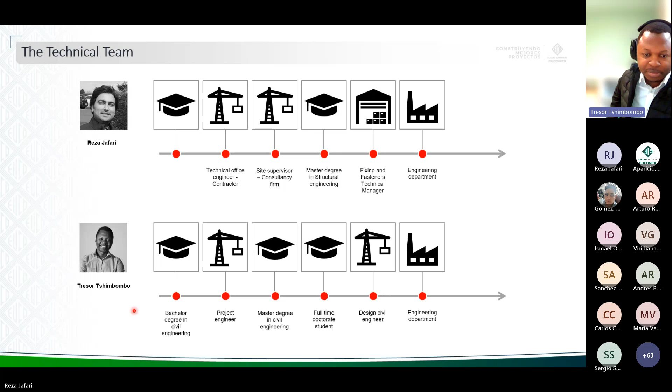Well, my name is Reza. I'm a civil engineer, and I've also got a PhD in civil engineering, working on tunnel segments made of fiber reinforced concrete. The world of anchoring is relatively new to me, but not the world of designing, because I've also had a background in a design civil infrastructure design firm. So yeah, I'm here and I'm happy to support. Yeah, thank you very much.

A wide spectrum of bonded anchors are currently available around the world. There are different types of categories and classifications of them, but the most standard version divides them into two main groups: capsule systems and injection systems. When it comes to capsule systems, we are talking about different types of chemicals that are inside a capsule type of anchoring. The other category is injection systems, and it's divided into three groups.

Today, our focus is more around organic binding material, which is going to basically cover unsaturated polyester, vinyl ester, and epoxy. So our focus is here, and please bear in mind that when it comes to chemical anchoring, there are a lot of different types on the market, but today's focus is only on organic bonding materials.

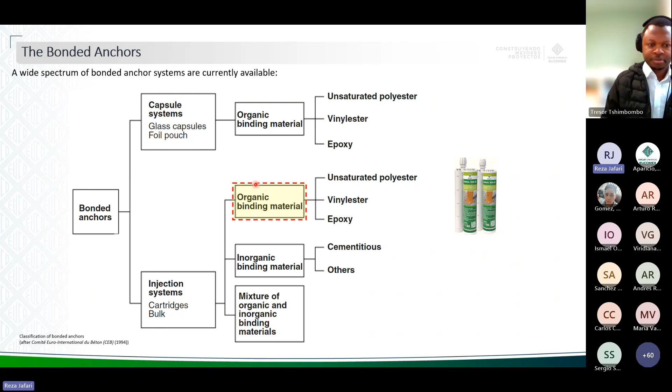When it comes to bonded anchors and injection systems, we are talking about cartridges. Cartridges usually contain two different types of chemicals. Universally, they call it part A and part B as two components - resin plus hardener and catalyst.

So what does it mean? It means we have one chemical here and another chemical here. When they're coming out and going into the mixing nozzle, that mixing nozzle is connected here - this is the static mixer. Those two chemicals start to mix into each other, and the final compound coming out of the mixer is two chemicals that got together and start to react.

So we are dealing with types of materials that react to each other - a chemical reaction, and that chemical reaction results in a bond between two different materials.

So when we are talking about two different materials, we are talking about inserts and base. The inserts can be threaded rods or rebars. We have more inserts available on the market, but today we are just going to focus on threaded rods and rebar because the practical reason is they basically cover most of the applications. And talking about base materials, we are talking about something that we want to connect these elements or inserts to.

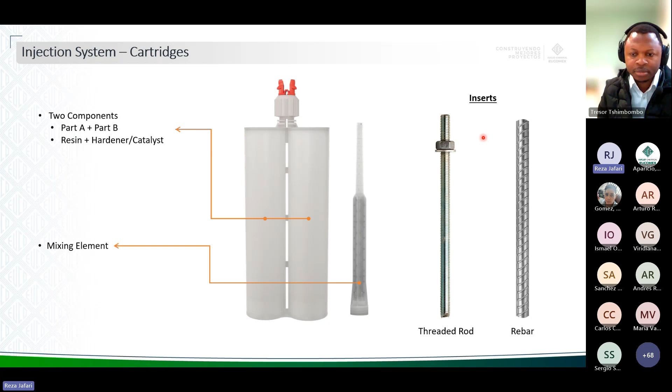Let's talk about mechanical anchors versus chemical anchors. When it comes to mechanical anchoring, the load transfer mechanism is mostly around mechanical interlock and friction. So basically we have a space around the anchor, and when we have a load - a tension load here, for instance - that mechanical interlock helps the system transfer the load.

When it comes to friction, it's all about those expansion anchors into the concrete. So when we have these kinds of anchors, it's a through bolt here, a wedge anchor. When we have them installed, we have an expanded part of the anchor - this cone goes through the sleeves and imposes some of the loads to the side. So we say we have a friction mechanism.

And finally, we have bond. What does it mean? It means we have the insert, we have the chemical all around the insert, and then we have the base material, which is concrete around. So basically, it's gluing our insert to the base.

This picture shows the effect of being close to an edge for a case of having a mechanical anchor. Mechanical anchors generate a lot of expansion around this area. And if we are, for instance, installing a post to concrete or base, and we are close to the concrete edge, then we have failures.

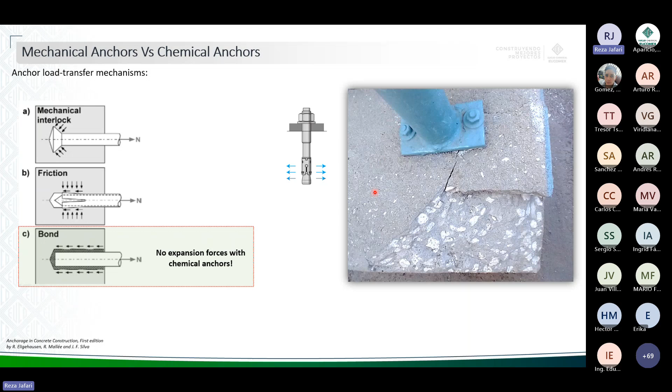Chemical anchors in general are sensitive to different things. The most important one is the resin type. When we have a different resin, even if it's produced by the same manufacturer, we have different characteristics. So the type of chemical is something that is going to change the behavior of the chemical.

The second thing chemical anchors have sensitivity to is the anchor rod diameter - the diameter of the inserts, if you remember, I was showing the threaded rod and rebar. The size of that element is going to affect the bond strength or the resistance of the system.

The next element that affects chemical anchors in general is concrete class. Concrete class can be from C20/25 to C50/60. These numbers can be different around the world, but at the end of the day, they are all talking about the compressive strength of the concrete. So if you're dealing with different concretes, the behavior of the chemical anchor is different.

The next one is concrete saturation. Is the concrete dry? Is the concrete wet? Is it a flooded hole? The meaning of flooded holes is you have a hole on the job site and the water is inside the hole. These things can affect the chemical anchors.

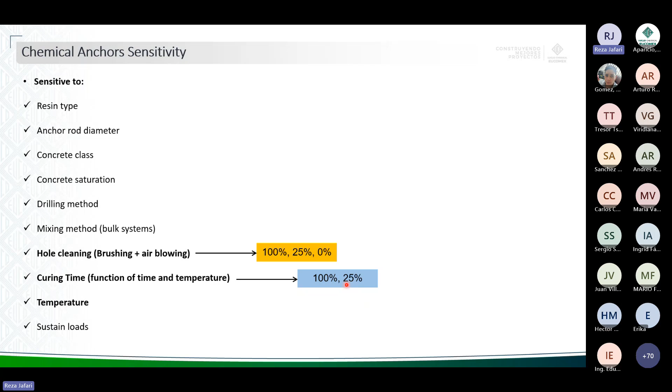Cleaning methods. Why is cleaning so important? Thorough hole cleaning, it is crucial for a strong adhesion and load capacity for bonded anchors. So basically, manufacturers on the market introduce something called manufacturer's installation instructions, or printed version, which is the MPII, and we are definitely referring to that.

I'll give you an example here. If you have one chemical on the market and the installation instruction, let's say the printed version, is something, and then you have another chemical and the printed instruction is something else, it shows that although they are both chemical anchors, the installations are different and can be different. So it's really important when it comes to hole cleaning to just adhere to the printed versions of manufacturer's installation instructions. Basically what you have to do is follow whatever is written in the product's approval. It can be the European or the US version of the approvals, whatever it is, we just have to stick to it and perform the installation.

Usually for normal applications, let's say DIY or small applications, a manual blowing pump can be used to remove the dust from the hole. This dust is created when you drill the hole. Again, it's very important, because if it's not done properly we're going to end up having dust in the hole. And when you put chemicals into the hole, instead of sticking to the side of the hole, they're going to stick to the dust, so basically the bond behavior or the resistance would be reduced.

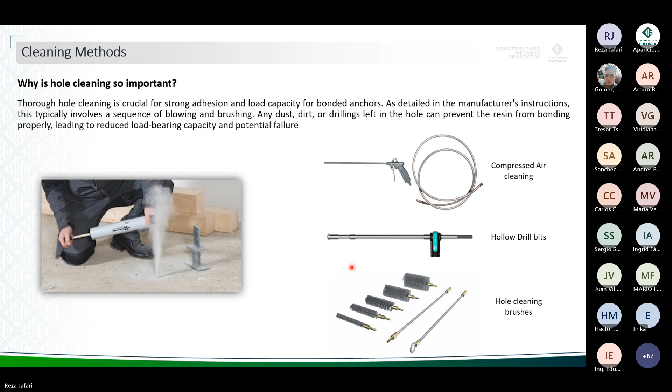If we reduce the hole cleaning, if we don't clean it properly, we have reduction. I don't want to explain about numbers, but what is important here is we have like 30% reduction here, and it's huge. So it means if we don't have any cleaning, we are basically risking the system because the bond behavior or the resistance would be reduced.

For bigger sizes, because the amount of dust inside the holes is quite considerable, that reduction is even more significant, around 65 to 70%. So again, be careful when you deal with chemical anchors, they are very sensitive to cleaning, and make sure that you perform the cleaning properly.

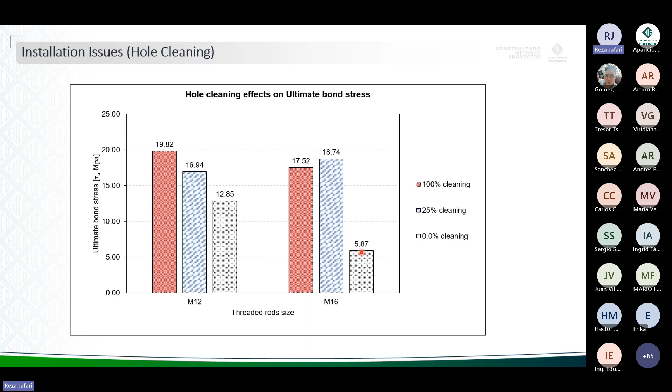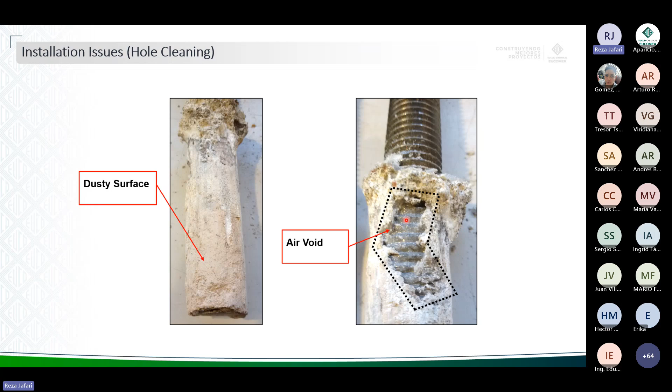And these are the threaded rods when the cleaning was not perfect. You see, after pulling them out of the concrete, all the surfaces are dusty. So dust is everywhere. And because we had all those debris inside the holes, we can end up having air voids as well.

Basically the warmer the weather or the environment gets, the curing time will be shorter. So if it's during the winter and you are dealing with a chemical resin, usually the curing time is longer than the curing time for the same resin when it's summer.

So how can we understand these times, the durations and everything? They are all mentioned in the product's approval. So when it comes to projects, the designer basically puts something as the specification for the resin, and then there is the supervisor on the job site responsible to check these times. And at the end, I think it's a responsibility of the person dealing with the chemicals to understand that the hotter it gets, the shorter the curing time and the working time as well.

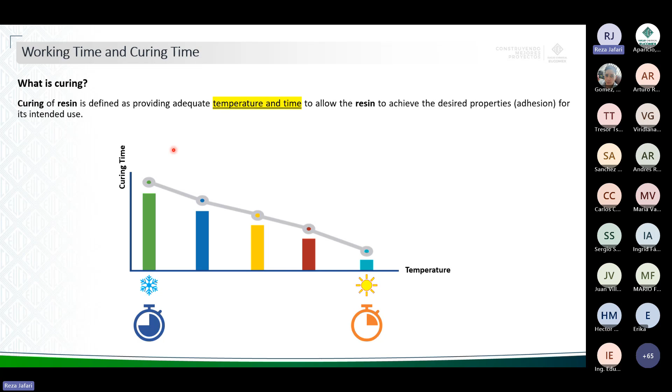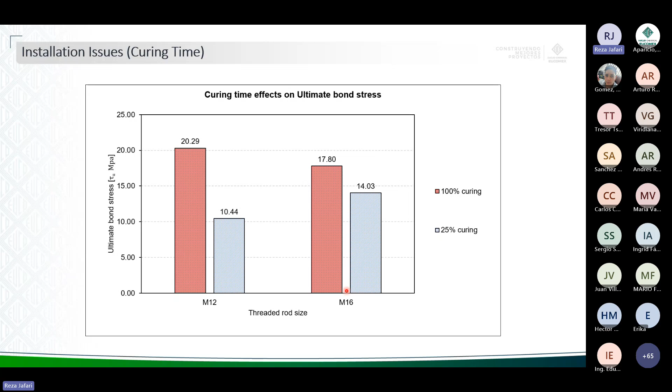Here, just another graph shows if the curing time is not respected, how much reduction we have is like 50% here. And then again, we have some reductions for larger sizes. What is important is the curing time should be always checked according to that approval and MPII by the company.

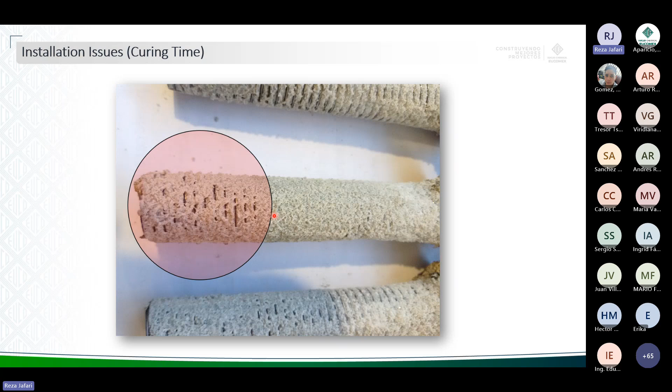Again, if you insert some chemical anchors into the hole, and then just before the chemical reaction is completed, you pull out basically the threaded rod or the insert, you can see the surface of the chemicals is puffy, and it shows that the surface is really smooth and is not fully cured. So again, it's another phenomenon to show on the job site - we have to be patient and leave the chemicals for curing time, basically.

Applicator tools is another aspect of the installation. If you have the chemicals, the most conventional manual tools available everywhere are just these hand injection tools. They are really cheap and suitable for normal DIY shallow installations. And if we are dealing with a few number of holes - if we are dealing with hundreds of holes, it's not really good to use manual tools because it's going to affect the installer's health and safety.

Then we have the pneumatic tools, much quicker. The downside is that they are expensive. They are suitable for deep installation, and they are designed for high number of holes. So if you are dealing with hundreds of installations at the same time, this is one of the best options.

The next one is battery tools. When you don't have enough space or access to compressed air hoses and compressors in general, the pumps, it's better to use the battery tools. The downside is obviously we are dealing with the tools and a battery, and batteries are prone to life issues. And again, like the pneumatic tools, they are designed for a high number of holes and suitable for deep installation.

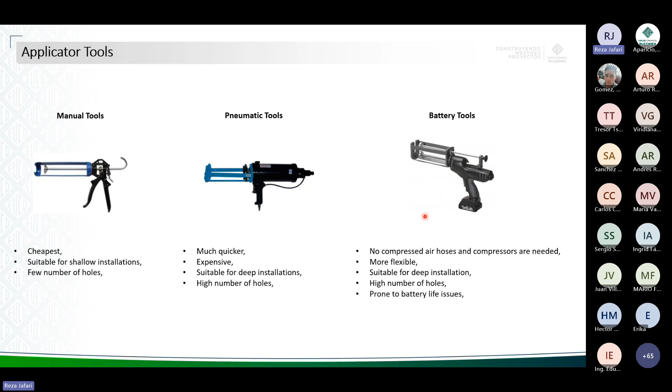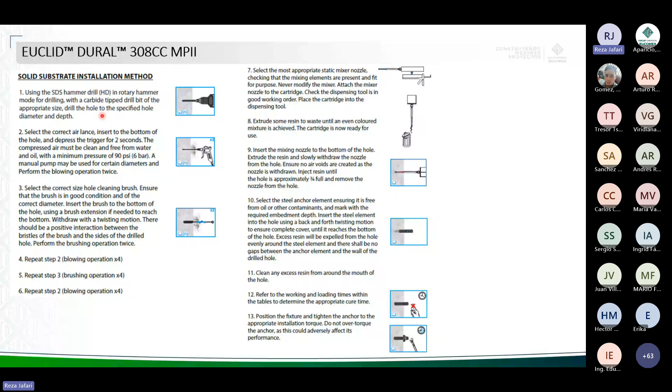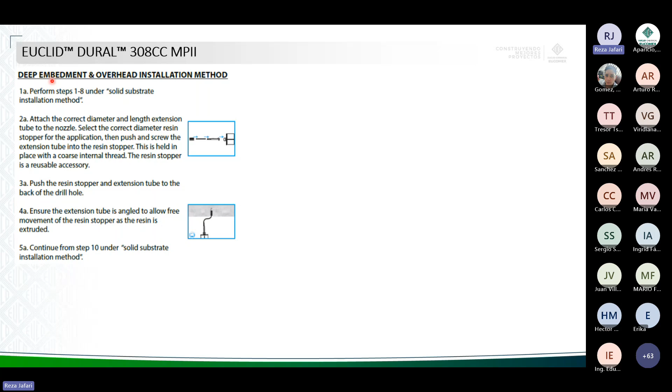Talking about Euclid product here, we're going to talk about 308CC, and I brought the MPII here to show these are not just pictures. When it comes to installations on job sites, people should go through the printed installation instructions and follow them based on what they're used for. For instance, if it's a normal installation method, that normal section should be used. If it's a deep installation, then the section related to deep embedment depth and overhead installations should be referenced. Talking about 308CC, let's see what are the main aspects or features of this product.

It's a pure epoxy resin. It's got the AC308 approvals. It's a 3:1 ratio, and the ratio is just referring to the different volumes that we have of component A and component B.

It is designed for extremely high bond strength in cracked and uncracked concrete. From a designer or structural design perspective, most concretes are cracked unless the designer confirms it's uncracked concrete. So this product is basically the one you want to go for because it's designed for both situations in concrete. There is no shrinkage when it comes to

308CC, and it's qualified for post-install rebar according to ACI 318-19 chapter 25. It can get even deeper embedment depth when it comes to rebar applications. I'm talking about a meter length of embedment depth, which is quite deep considering normal applications. It is approved for seismic design category F, and the user basically has 18 minutes working time with the chemical,

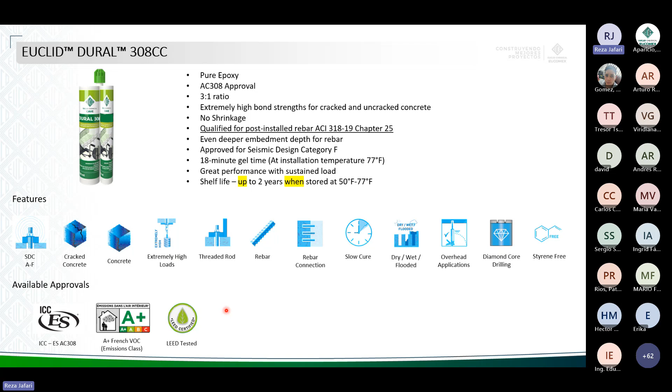and it's less harmful because it's a styrene-free product anyway. When it comes to environmental aspects, we have all those approvals available for the product, which would make it one of the best products on the market.

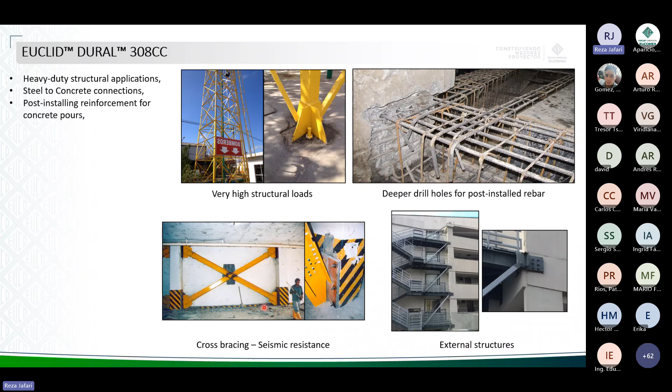As I said, they are designed for very high structural loads, deeper drill holes for post-install rebars, and when you have very close edge distances, if you can see here, and then for bracing systems, which is usually used for seismic damping systems, and obviously for external structures as well.

Another product in the range, the Dural range, is Dural 200. This has AC308 approval, high bond strength in cracked and uncracked concrete. Again, it makes it suitable to be used in any sort of concrete. High performance in sustained loading. If it's a sustained load, the performance is fantastic.

Impressive maximum service temperature, which is let's say 120 to 176 Fahrenheit, and it's fully cured in 40 minutes. What does it mean? It means this can be used for applications where people usually need them done in a short period of time. So again, different feature, different product, different characteristics.

Suitable for use in seismic design category B buildings, category F buildings, can be installed in freezing conditions with no loss in performance, which is particular and really important because obviously the temperature, as we said, is going to affect the curing time, but it's not affecting the final performance of the product, which makes it really ideal for those applications. Shelf life up to 18 months when it's stored at 40 to 77 Fahrenheit.

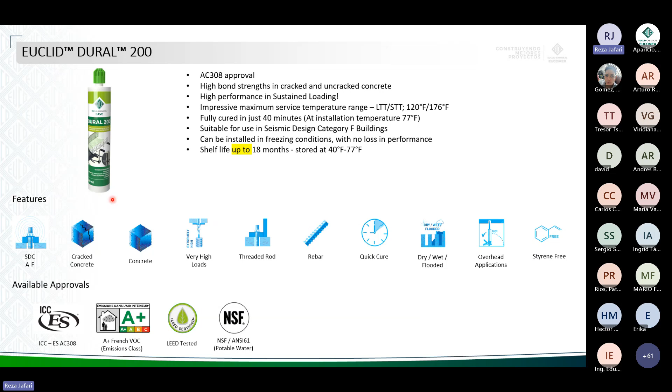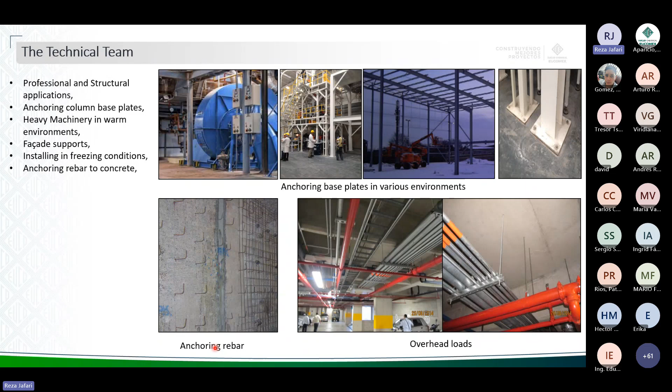Another part, explanation about different applications. It can be used for different types of applications, from dynamic loading to static loading, and anchoring base plates in various environments. If it's cold or hot, it doesn't really matter. For anchoring, for rebar, and improving the behavior of the structures, and for overhead loads.

A potential product for Euclid is Dural 150. It's designed as a product useful for DIY applications and home improvements, for non-structural applications, like handrails, satellite dishes, and bike racks. It's another handy product for DIY and normal applications.

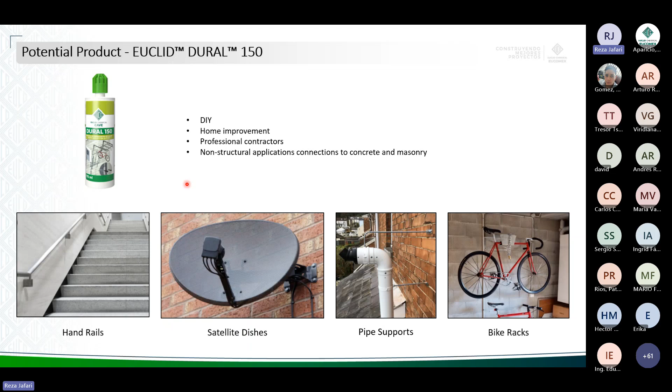Let's talk about the evaluation reports and how to use them. This training isn't going to be technical. I just highlighted some of the most important things that can be taken from an approval: for anchoring solutions, complete product information and resistance, approved anchor types and sizes, temperature range, concrete condition and installation, and bond strength, which is most important for designers, down to the drilling methods. All of this can be found inside the ESR 5352. Getting these numbers and having the approvals means the chemical resin has been through a tremendous amount of testing, because of safety. That product should be safe, so it goes through all those testing programs.

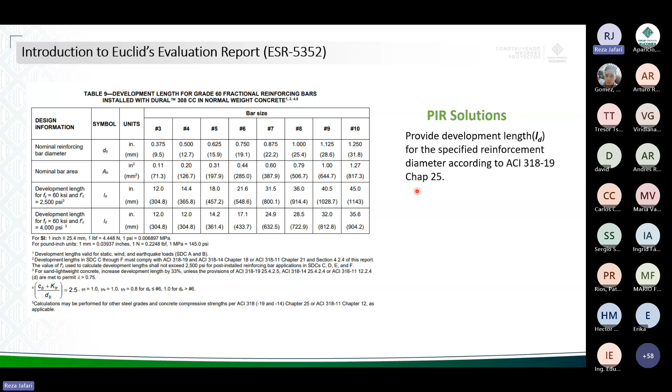Talking about PIR, or post-install rebar applications, we have sections dedicated for that. It helps find the bar sizes and the corresponding embedment depth. This information in the approval should be used by qualified, competent designers, but it's good for you to understand how good this product is, because it can offer both anchoring and post-install rebar applications.

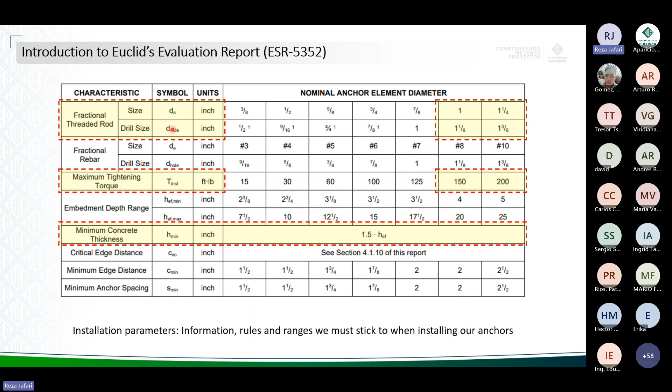A little bit about installation instructions and details. The same document shows different things, like the diameter and the drill size. If you don't have the drill size, you shouldn't change it, because all the tests and performance are based on these fixed numbers. For every single size, we have only one option for drill size.

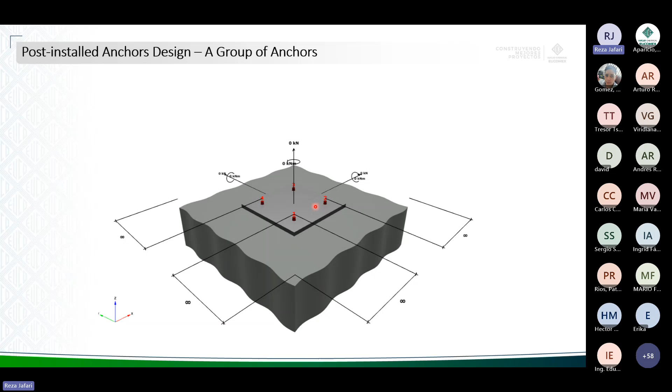But when we have a group of anchors - say 4 anchors and a base plate - these anchors are basically overlapping each other, and those volumes overlap and affect the performance. When dealing with a group of anchors, which is the most common case, we don't usually have just one single anchor. The designer, or whoever is dealing with anchors, should make sure the final resistance of the system is verified.

How does that verification happen? By considering the different loads working on the system - loads trying to shear off the anchor. We call loads in these directions shear load. When the load is perpendicular to the surface of the base plate, we call it tension. Usually on a job site, in real design cases, we're dealing with a combination of these.

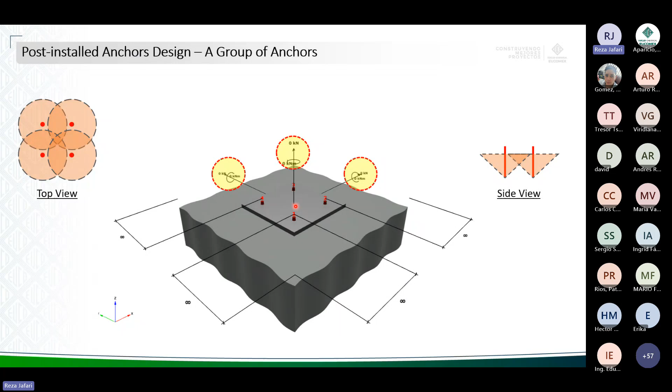I mention these because they're important for the next topic: failure modes of post-install anchors. When we have only tension load, in line with the direction of the anchor - say a column with a load working in line with it - we have tension. If the anchor is strong, we can see different failure modes: steel failure, concrete cone failure, pull-out failure, and a combined situation involving concrete and resin. Then there's concrete splitting failure and concrete blowout failure, which happens when the anchor is close to an edge.

However, when we have a load trying to shear off the anchor, we have different failure modes. In the previous case the load was in line; this time the load works sideways - for a column, this would be a side load. Here we have different failure modes: steel failure with lever arm, when the shear has some distance from the concrete surface, then concrete pry-out failure, and finally, when close to an edge, a failure mode called concrete edge failure.

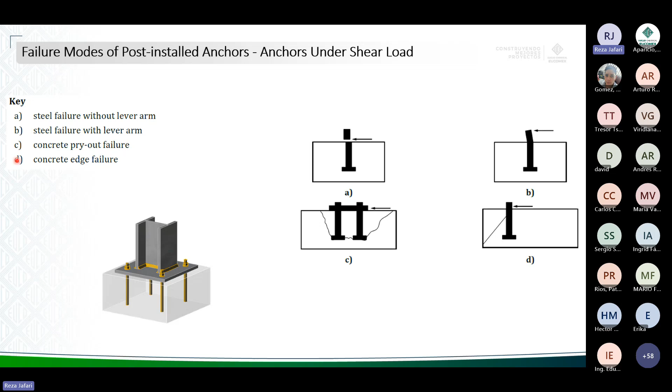Again, these are mentioned because it's important for you to understand that things can go wrong, specifically if calculations are not performed by a competent design team.

Even about one of these formulas or failure modes, we can talk a lot, but today's meeting wasn't designed to dive into the technical side of it. It was more practical. I hope you guys found it interesting and useful. Feel free to let us know if you have any questions. Tresor, please help me if you have already some questions in the question bar so we can go on and answer them.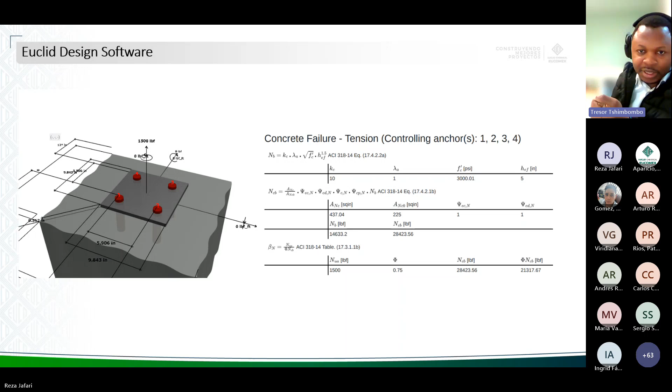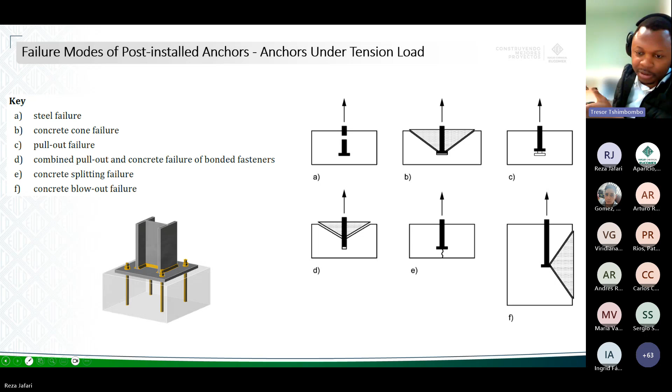I've been answering some questions in the chat, and some are still coming. One was why the maximum embedment length of a 1 1/4 inch diameter anchor is limited to 25 inches. In the theory of anchoring design, you've got a range you work with: the minimum is 4 times the diameter of the anchor, and the maximum is 20D, D being the diameter of the anchor. Therefore, for 1 1/4 of an inch, you have 25 inches. That was a question from Arturo.

And then about the software, as Reza said during the presentation, this is the Euclid software used to design anchors according to ACI 318.

Any more questions, Tresor? There's one more question here: does your evaluation not increase the strength when the concrete has high compressive strength?

Yeah, it's a really product-dependent question. Some of the chemicals on the market don't show that much influence from the concrete class. But usually, for most products available on the market, when it comes to very high strength concrete, we're dealing with a smoother base material, so we tend to have a reduction in bond strength. It's a product-dependent phenomenon—some products aren't affected much, but for others it's a huge effect. Specifically, that's why there's a limit of C50-60, because there are concretes like C90-100, very strong concretes on the market. But the downside is when you drill a hole in those concretes, you usually get smoother holes, which affects the bond of the chemicals.

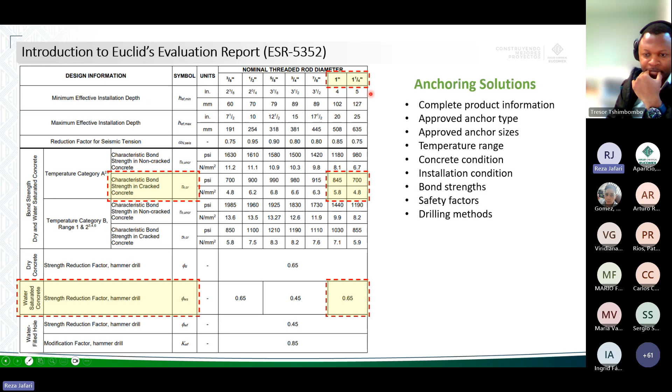When it comes to cracked concrete, for instance, and we already have reinforcements in the concrete, they affect the edge behavior of the system, because if you consider the truss model when designing or dealing with anchoring theory, having steel already in the concrete helps transfer some of those stresses not only to the concrete but also to the reinforcements. So it improves the behavior. We have some coefficients for cracked concrete that can be defined in the program when dealing with reinforced concrete. But in general, in anchor theory, the influential elements affecting system behavior are more related to the concrete and the product's characteristics. Although there are some effects from reinforcement, the main effects come from the product itself and the concrete as a substrate.

So, another question. Where can we get this product? That's for the commercial people, I think Oscar will be more geared to answer that question.

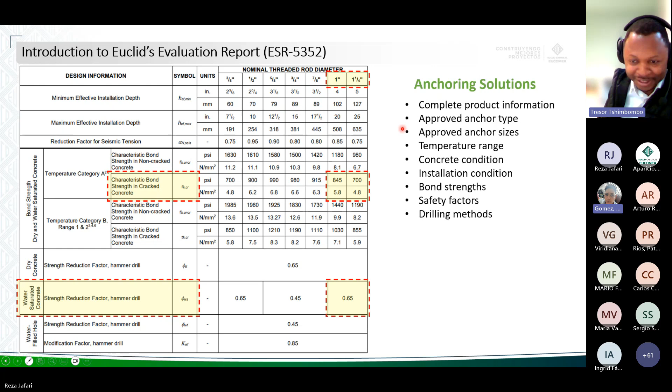Can we clean the hole with water? Yes, we can clean the hole with water, and actually it's one of the best solutions on the job sites, specifically when we are dealing with deep embedment depth. Pressurized water can be used to remove all that dust and debris from the hole. The only thing you have to consider is that some chemicals are sensitive when installed in saturated or flooded holes. So I usually say if you want to get the maximum strength out of the chemical or product, even if you are washing the hole, it's better to wait until it's saturated or a little bit dry.

Another question: what is the lifespan of a structural chemical anchor? For example, 10, 15, 20, 50 years? Again, lifespan is just an indication of the life cycle of the product if everything is fine. That's a tricky term to deal with. If everything is okay in terms of base material and installation, we usually say they are designed for a minimum of 50 years. But at the moment in Europe, for instance, we are dealing with a life cycle of structures of 100 years, and in the future maybe 120 or more. The main reason is the longer the life cycle of the structures, the more sustainable they are. So we have to make sure that whatever product we use has the same level of life cycle. So the answer is 50 years, and in some cases 100 years as well.

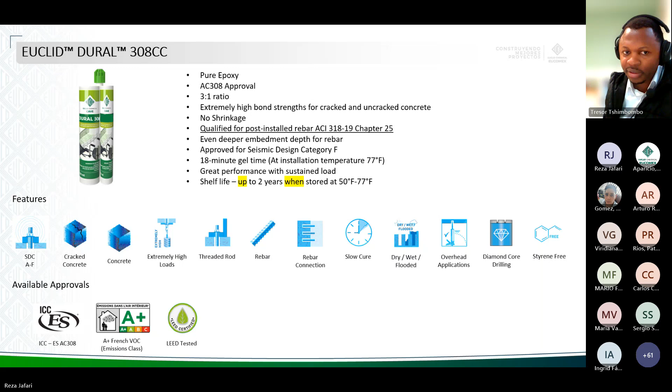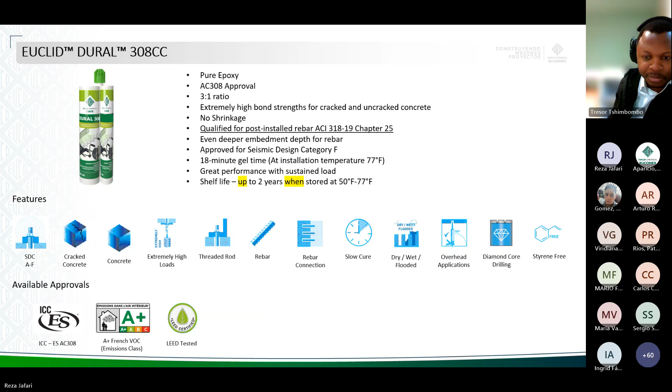Does anyone want to activate their microphone? Marielle, do you have a question? No, just a second, I think there's no more questions. Just give me a second for Mariel to finish the training, please. Okay, yeah sure. Ah, there is Cesar Magana who says he has a question. Yeah okay, he's still typing it.

What about dynamic load? If the question is referring to seismic, then yes, that product is approved for seismic applications, and there are methods available for designers to substitute equivalent seismic actions with corresponding dynamic loads. For example, if we're dealing with a pump or machinery connected to the base material that has cyclic loading, there are mathematical methods that can be used for shifting between two different types of load or action nature, and then comparing it with the values mentioned inside the product's approval.

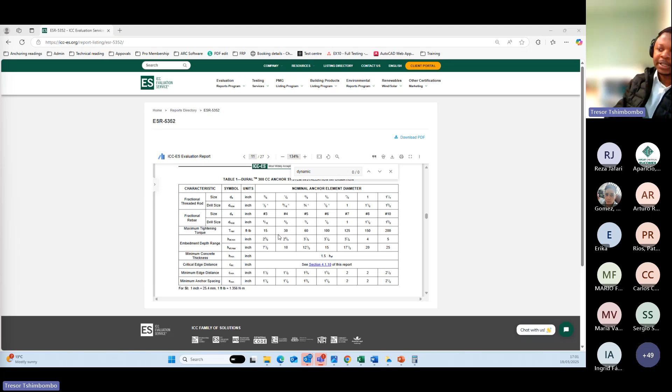Nice, any more questions, or are we done? I think we're done, Tresor. Okay, thank you so much, Jafari and Tresor, for your presentation. Appreciate it—honestly, some of those questions were fantastic and really into details. We really enjoyed the engagement, because more questions like that mean people are starting to engage.

Thanks, it was fantastic to be here. We could tell we were facing practitioners and people involved in designing or working with anchors or construction in general. So I think this was a first one, but not the last one. If there are aspects you want to know more about, or more technical differences between products and their performance, just convey them to Oscar, and we can organize another training geared more in depth to other topics of your choice.